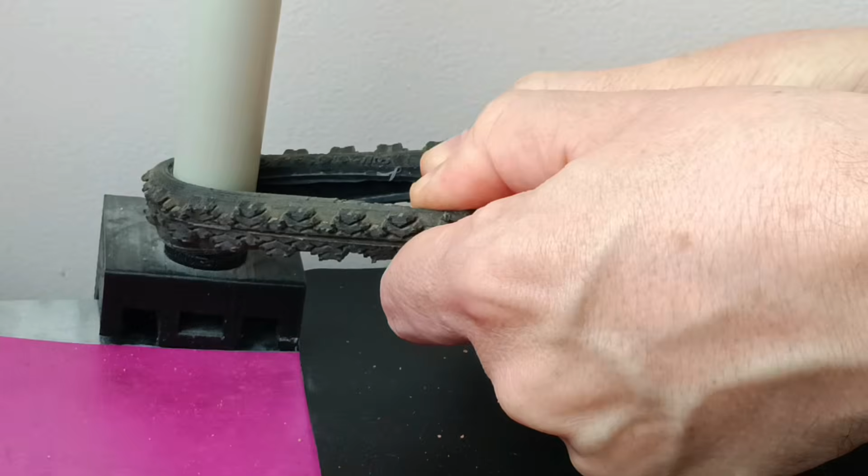This tire is 5 years old. I made it myself using liquid silicone. And today, we're going to find out if it was a complete waste of time.

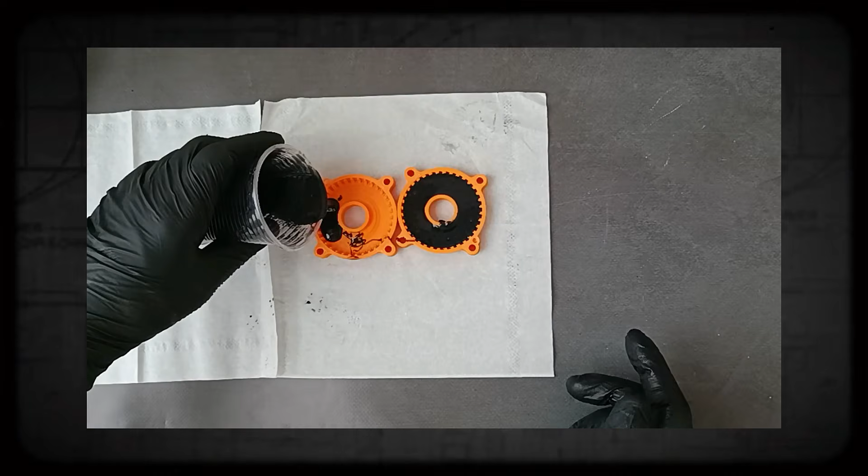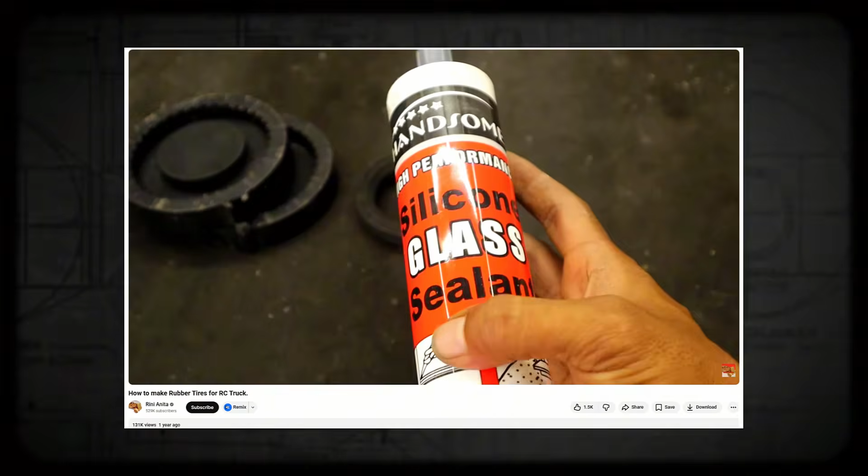All right, let's start with the basics. The most common question I get is, why spend money on professional kits when I can just grab a $5 tube of silicone caulk from the hardware store and squeeze it into a mold? Look, if you do that, you're setting yourself up for a disaster.

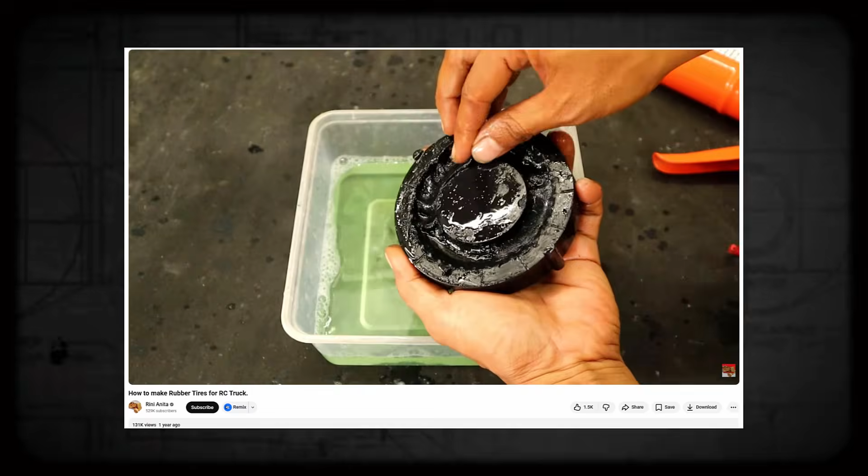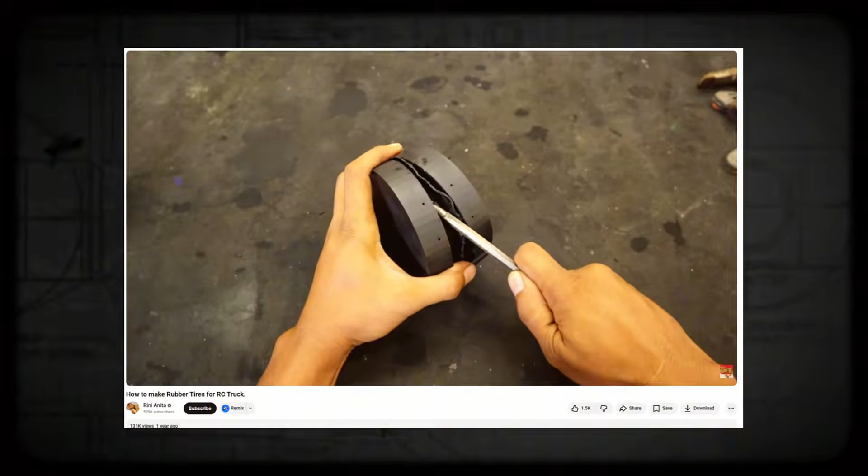Here's the deal. Hardware store caulk is 1 part silicone. It needs air and moisture to cure. Plus, that sharp vinegar smell, that's acetic acid. It's nasty, and it can actually ruin your molds over time.

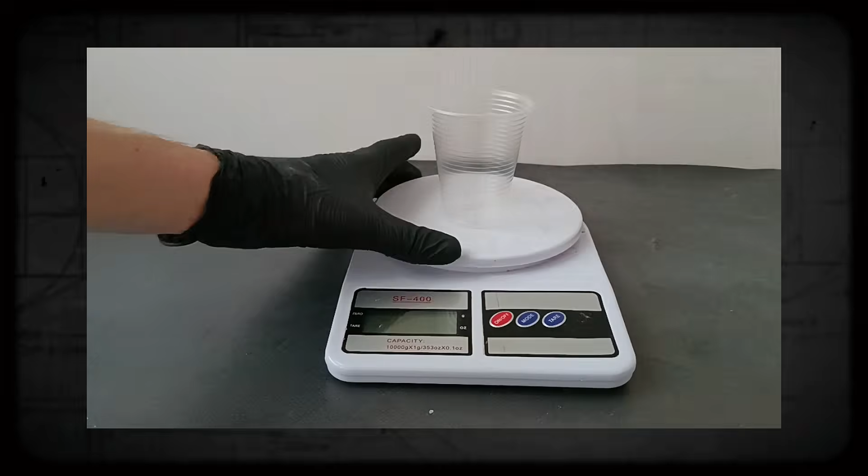I only use 2-part casting silicones, part A and part B. When you mix these two, a chemical reaction happens that doesn't need air at all. It cures perfectly even, from the surface all the way to the core of the tire. It's predictable, it's stable, and it's the only way to get a professional result.

Bottom line, caulk is for sealing your bathtub and window. 2-part silicone is for building high-performance parts. Don't mix them up. Now, let's talk about viscosity. If you're not a chemistry geek, just think of it as thickness.

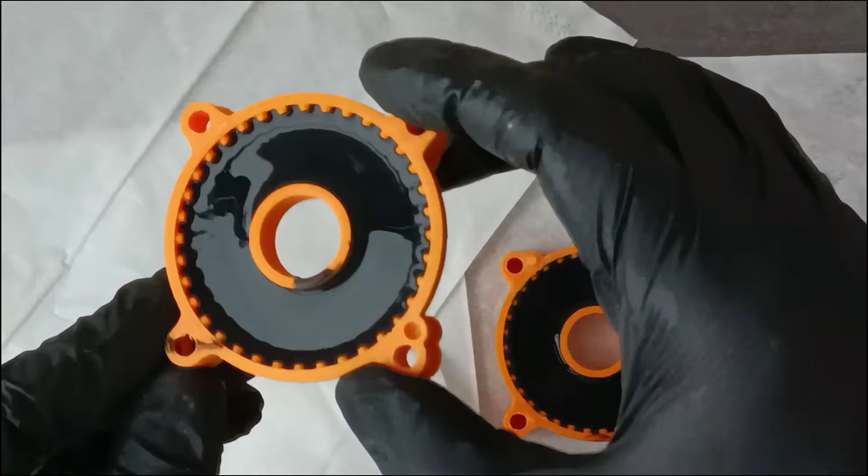Why does it matter? Because if your silicone is as thick as peanut butter, it's never going to reach the bottom of those tiny tread patterns. First, we have tin cure silicones. These are your workhorses, but they're usually thick, like heavy cream. They're great for simple molds, but they love to trap air bubbles.

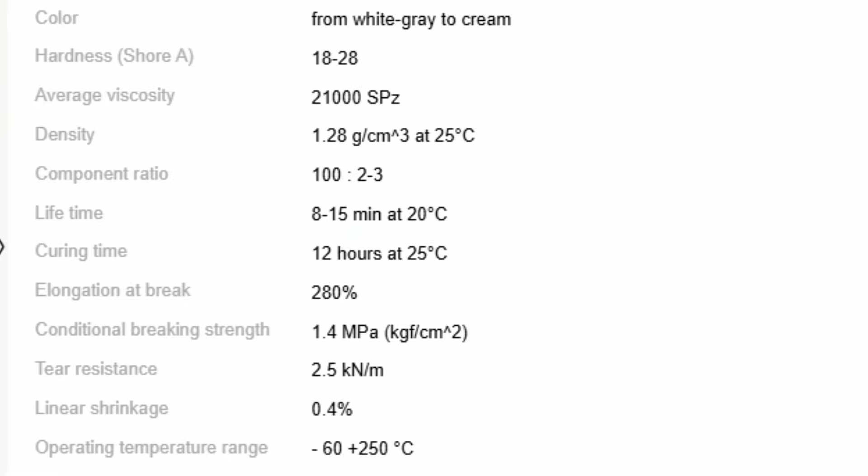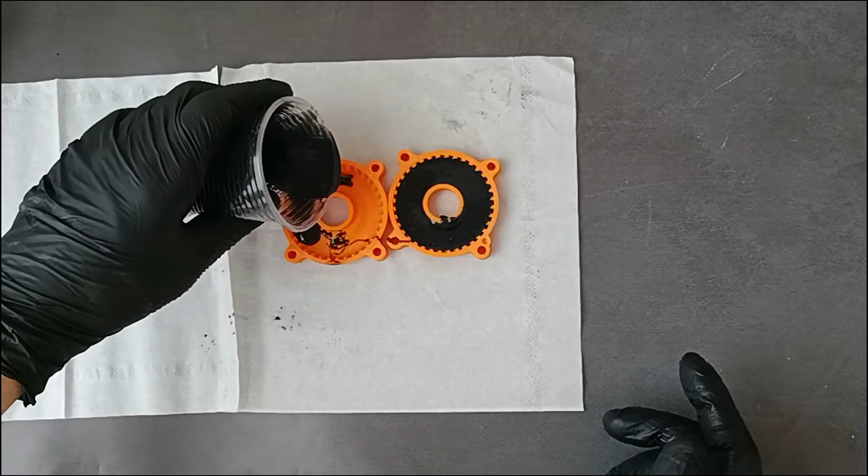Then there's platinum cure silicone, my go-to choice. Usually it's much thinner, almost like milk. It flows into every microscopic detail of the mold. But be careful, platinum is picky. If your mold has any traces of sulfur or cheap 3D printing resin, it won't cure. It'll just stay liquid, forever.

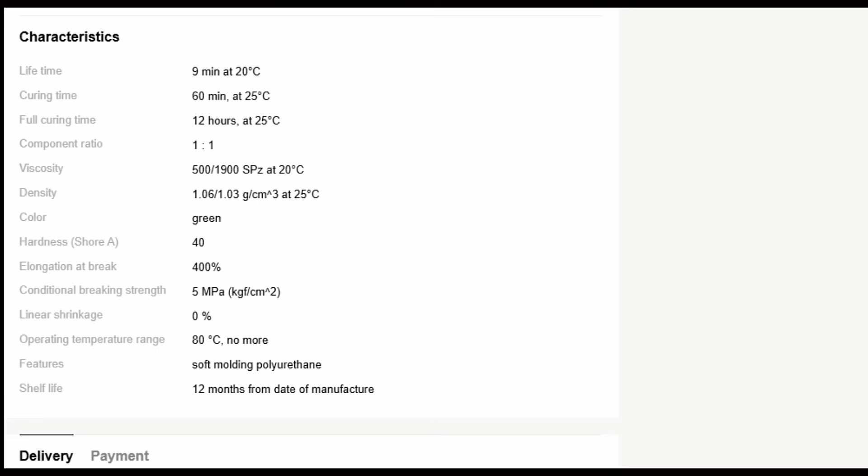And finally, polyurethane. This stuff is thin like water when you mix it, but it has a very short pot life. You have to work fast or it'll turn into a solid block right in your mixing cup. In this lab, we're looking for that sweet spot, liquid enough to capture the detail, but tough enough to handle a brutal rock crawling session.

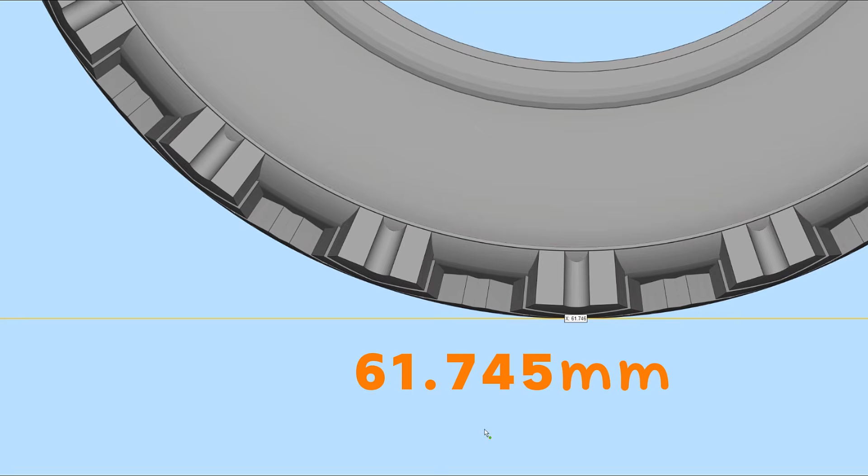Here's the deal. Every silicone has a shrinkage rate. Tin cure systems can shrink up to 2%, while platinum cure is usually much lower, around 0.5% or less. But honestly, don't let those numbers scare you. In the RC world, if a tire shrinks by a fraction of a percent, it's actually a good thing.

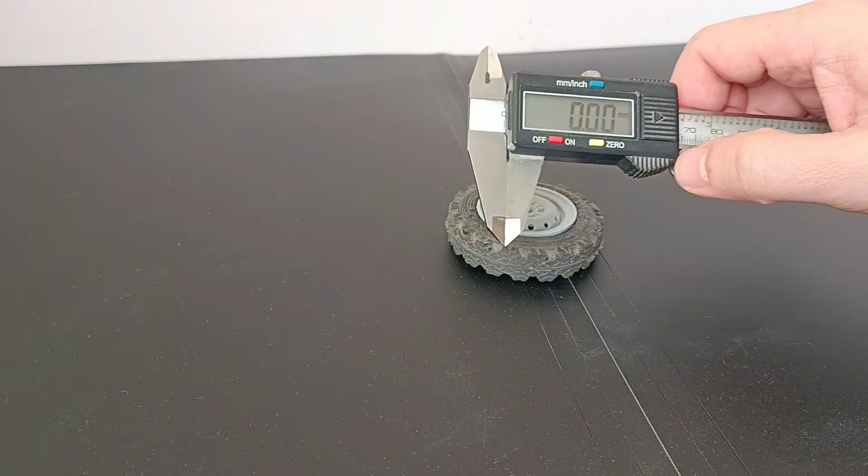It just means the tire will sit even tighter on the bead lock and stay secure during heavy loads. It's like a built-in tensioner. The most important advice I can give you, stop guessing and read the manual. Every bottle of casting silicone comes with a technical data sheet. It'll tell you the exact shrinkage percentage right there.

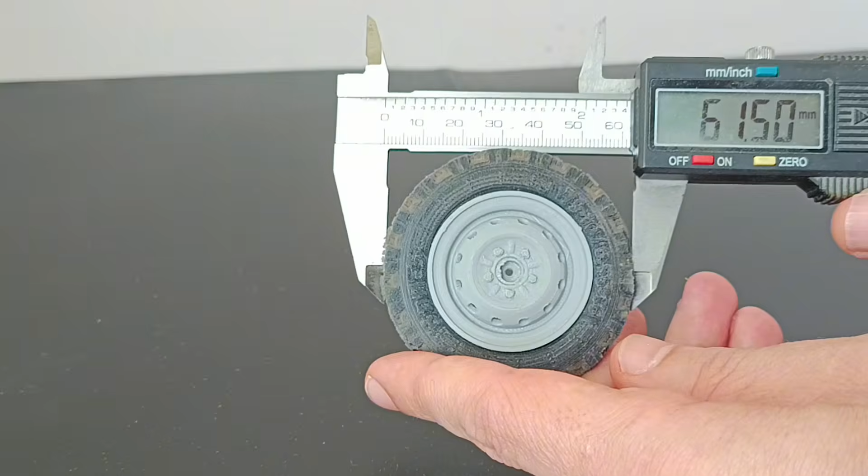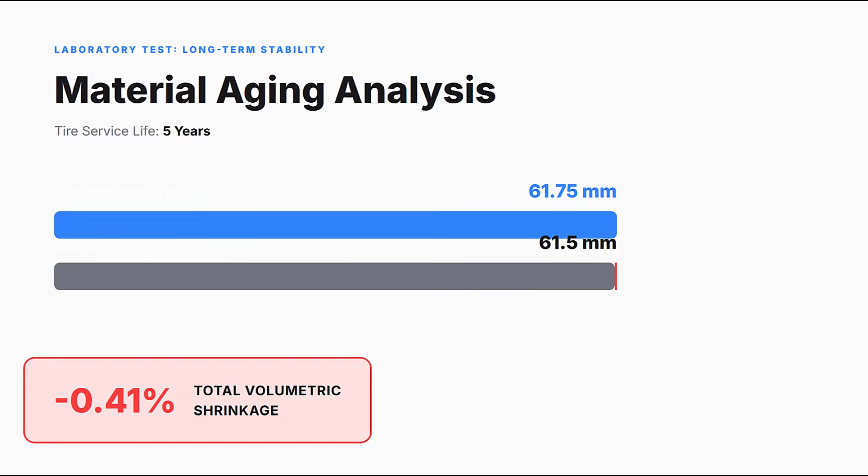Don't worry about good versus bad silicone. There's no such thing, only the wrong material for the job. Read the instructions, know your numbers, and use that shrinkage to your advantage. Short answer? No. If you're worried about them rotting in your garage, don't be. It's a non-issue. All right, let's get to the part you've been waiting for.

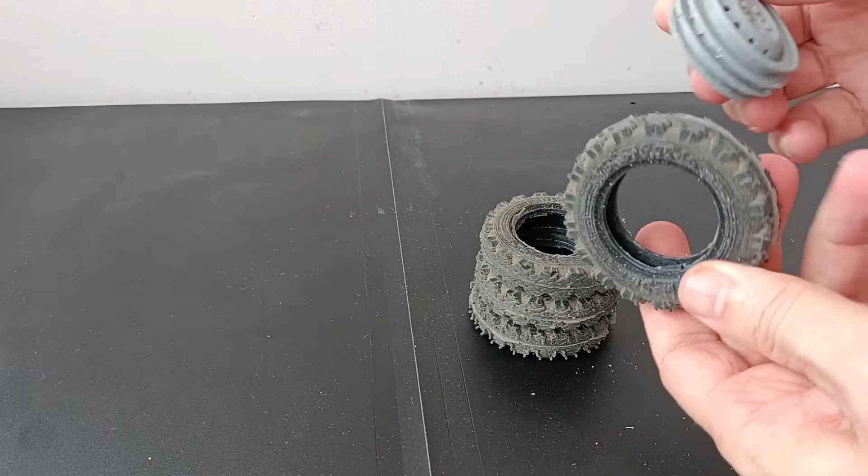This tire is 5 years old. Usually, by this time, cheap rubber starts to crack and fail. So the big question is, will it snap right now?

Most high-quality casting silicones have an elongation at break of 200 to 500%. According to the technical data sheets, this means the material is designed to stretch 2 to 5 times its original length before it starts to tear. 5 years ago, I was using silicone with only a 200% rating.

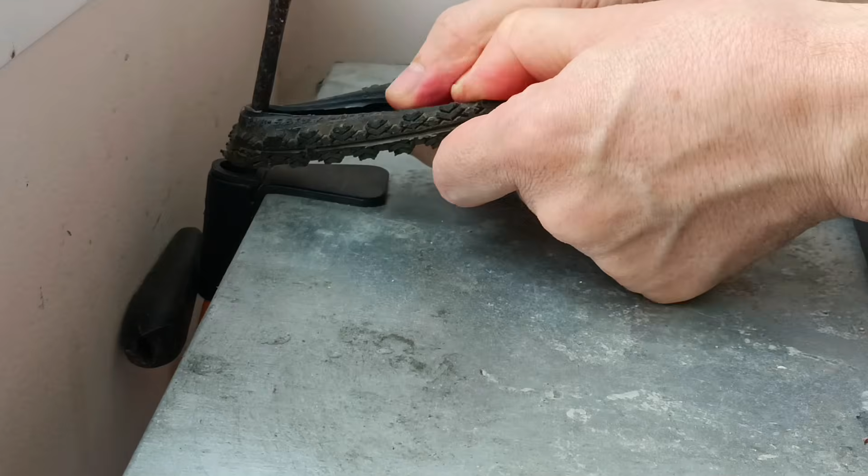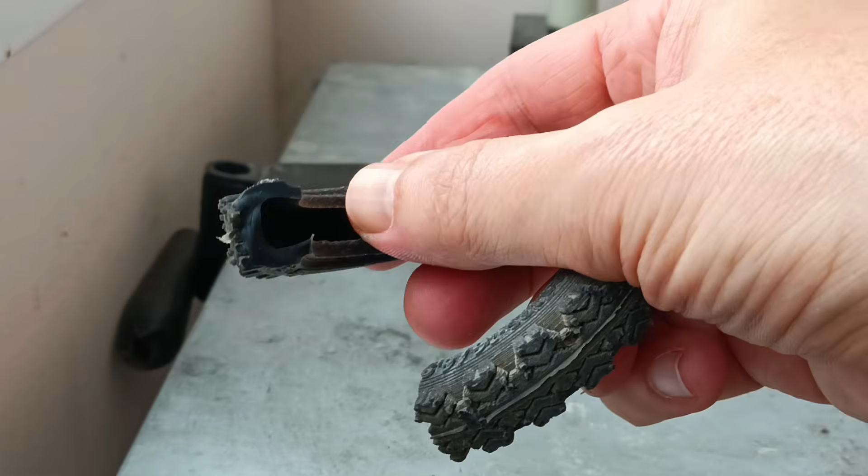Think about this. This type of silicone is the same stuff used to make molds for heavy concrete castings. Those molds take a beating and can produce hundreds of copies without failing. If it's tough enough for industrial concrete, it's more than tough enough for your RC rig. I'll let you decide if that's durable enough for your needs. Unless you're doing high-speed burnouts on hot asphalt every day, these treads stay sharp for a long, long time.

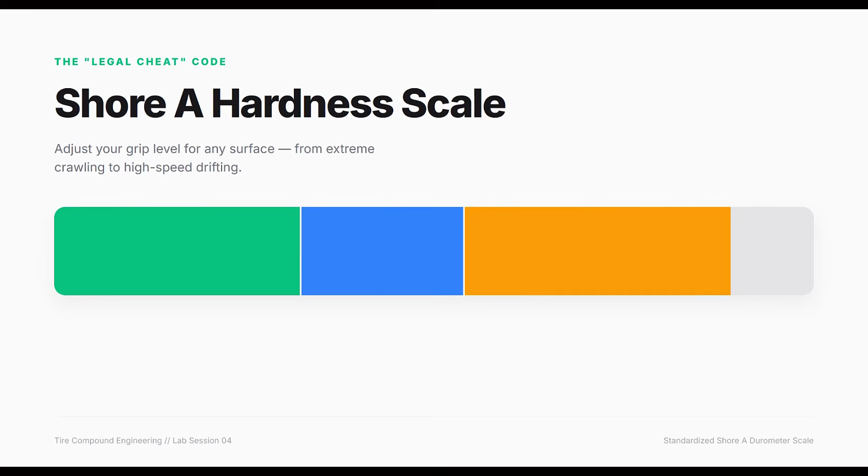But the real point isn't just about saving money. It's about legal cheating. By picking a specific shore hardness, you can tune your grip level to any surface, from rock-hard compounds for drifting to super soft, sticky formulas for extreme crawling.

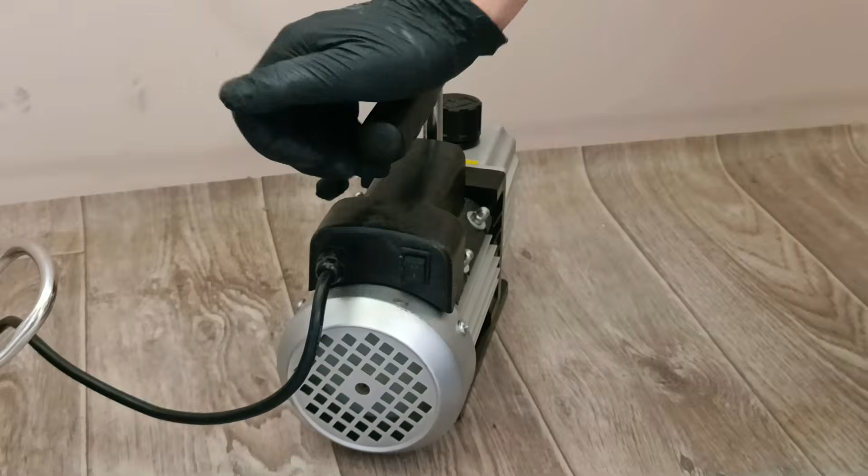The short answer is, it depends on what you're pouring. If you're using platinum cure silicone and the viscosity is under 6,000 units, you're usually good to go. It's thin enough for the air to escape on its own before it cures. Same goes for polyurethane. That stuff is so thin, bubbles aren't even an issue.

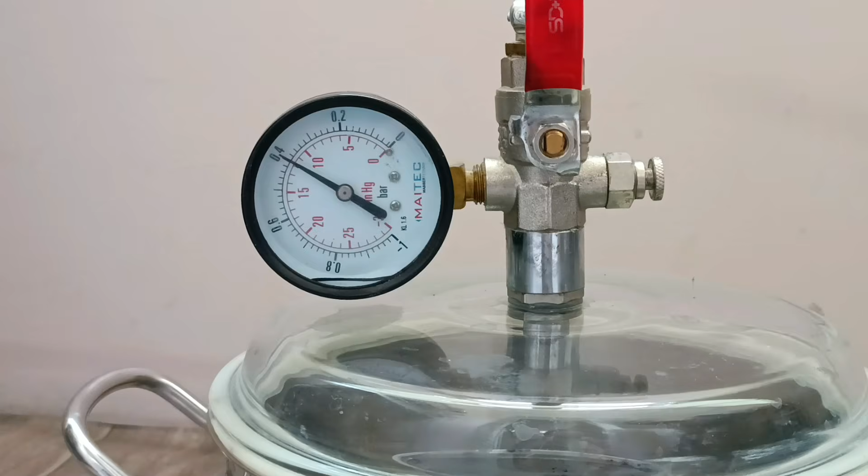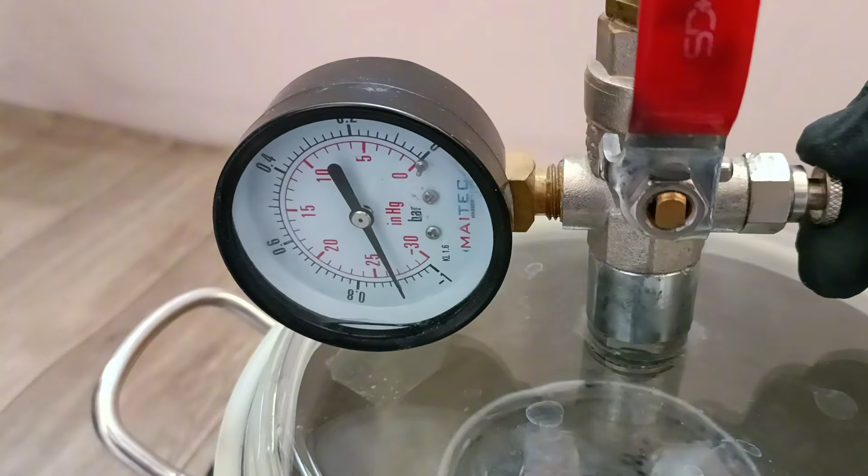However, if you're working with tin cure silicone or anything with a viscosity above 6,000 units, then yes, you definitely need a vacuum. Without it, those thick mixtures will trap air like a sponge, and your tire will end up looking like Swiss cheese. The secret is always in the manual. Check the viscosity rating before you buy. If it's low, save your money on the equipment. If it's high, you'll need the suction.

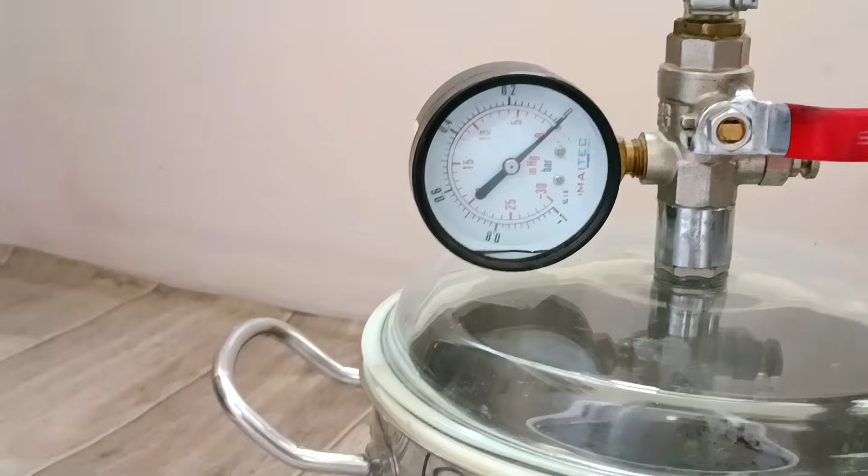I'll be 100% honest with you, I've never tried this, and I've never seen anyone else pull it off successfully. On paper, it sounds like a clever budget hack, but in reality, I have my doubts if it can create enough vacuum to actually work. I'm leaning towards impossible, but I want to hear from you. Have any of you tried the syringe trick? Is it a hidden gem or just a waste of time? Drop a comment below and let's settle this myth together.

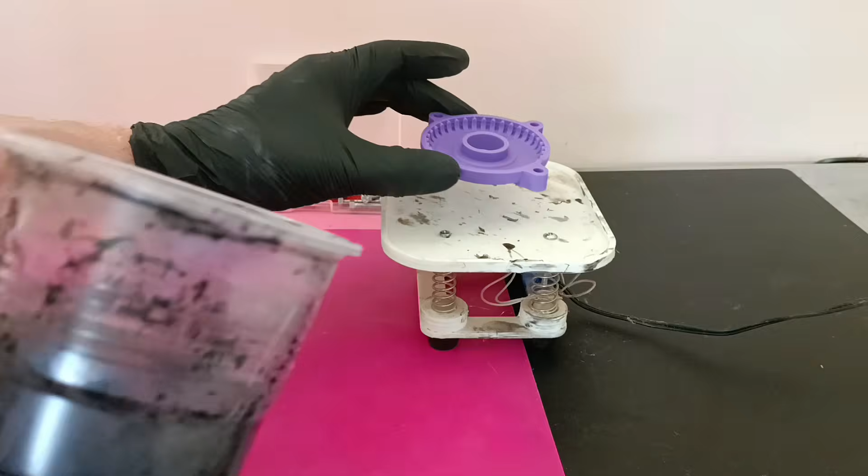The short answer is absolutely. Think of it this way: vibration helps break the surface tension that keeps those tiny bubbles trapped against the walls of your mold. It coaxes them to the surface much faster than just letting the mold sit there.

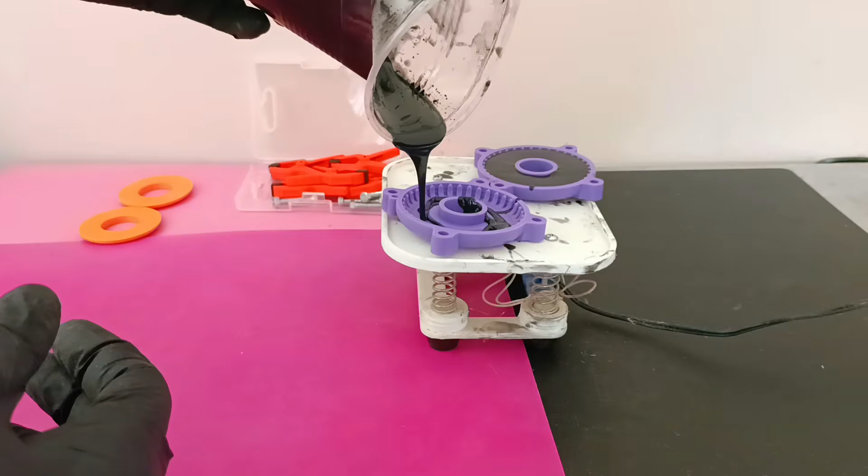If you don't have a vacuum chamber, a vibrating table is your next best friend. Even a DIY setup like a sander without the sandpaper, or just tapping the mold on the bench, can make a huge difference. It's a simple step, but it's the secret to getting those crisp, perfect tread edges without the voids.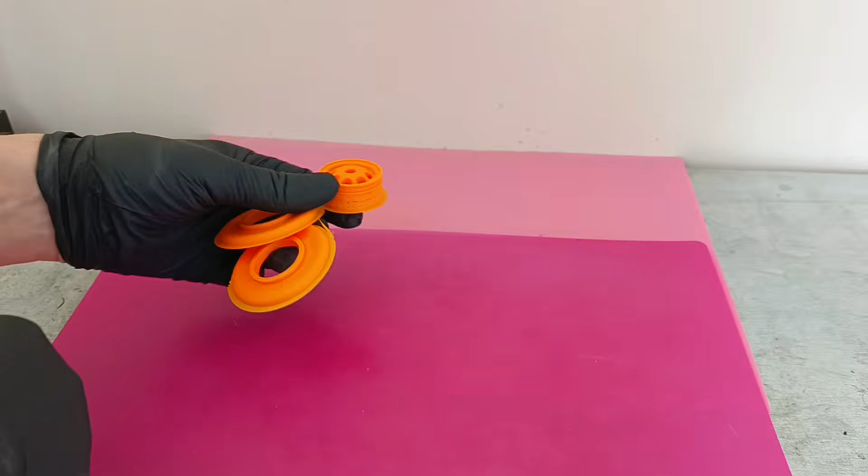How do you make the tires hollow? And is it worth using rotational molding for this? Not at all. It's much simpler than that.

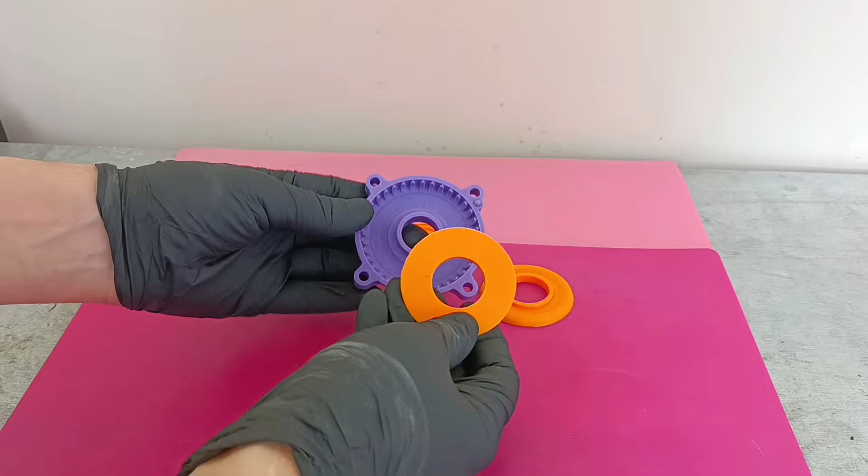If you've watched my build process closely, the secret is in the central inserts. After I pour the silicone into the mold, I simply drop these cores into place. They displace the liquid material and form the hollow cavity perfectly as it cures.

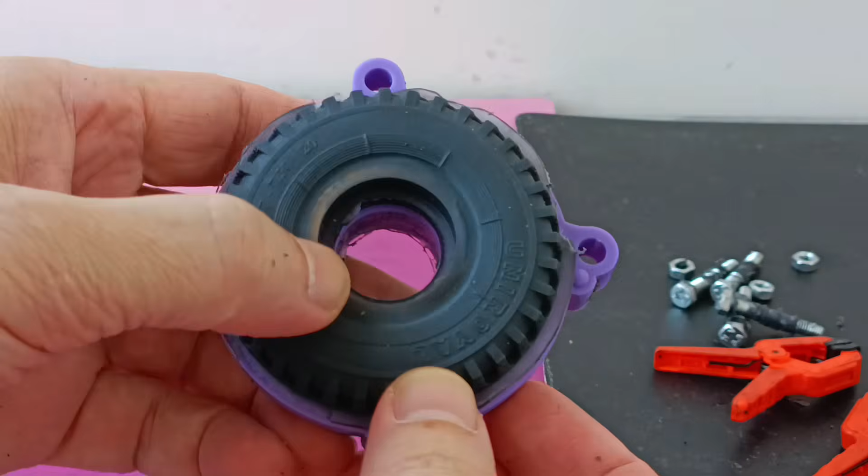The beauty of this is the flexibility. If you want a traditional hollow tire to run with foams, you use the inserts. But if you want a heavy, solid core tire for maximum weight down low, you just leave them out. One mold, two completely different results.

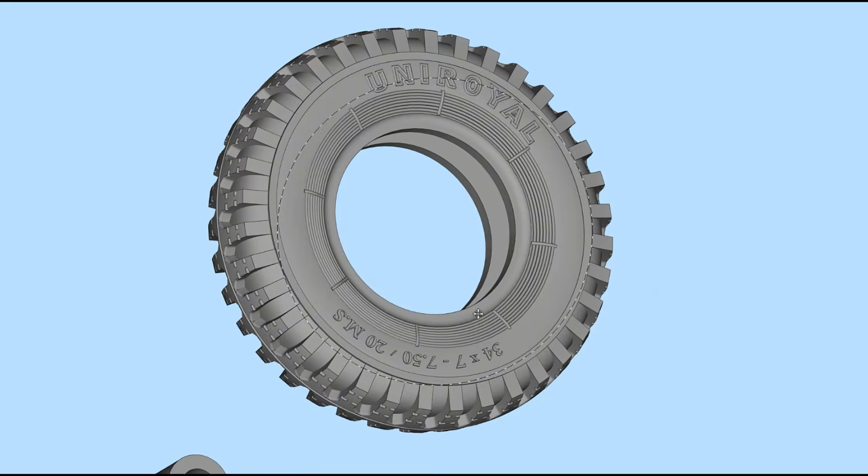No rotomolding machines required. The truth is, you totally can. In fact, when you get my designs, I include both the mold files and a standalone tire file ready for 3D printing. I'm not here to stop you from experimenting. But there is a catch: detail.

When you print a tire, you have to deal with supports. Wherever those supports touch the material, you're going to lose that crisp sidewall lettering and fine tread detail. It'll work, but it won't look factory.

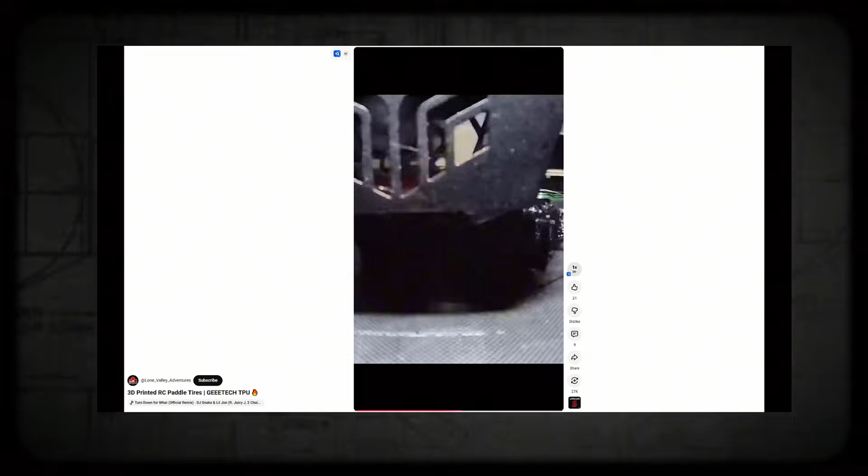If you just want a functional tire and don't care about the scale look, print away. But if you want a tire that is indistinguishable from a high-end store-bought version with perfect details on every surface, casting in silicone is the only way to go. It's the difference between a printed part and a professional component.

That's it for today's Q&A. I hope this cleared up the mysteries of DIY tire making.